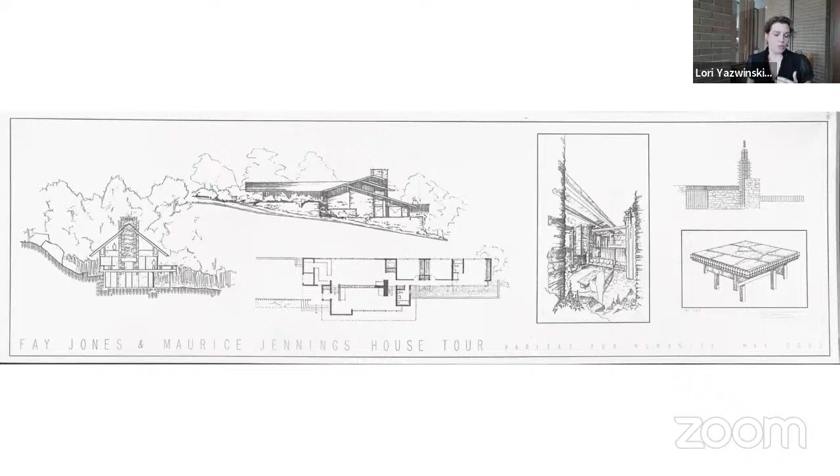So by no means do I consider myself a Fay expert in that respect. But like I said before, I've had the opportunity to work in the office, to study the work, to study the details, to study the ideas. And so in that respect, I feel like I've learned him or met him through that.

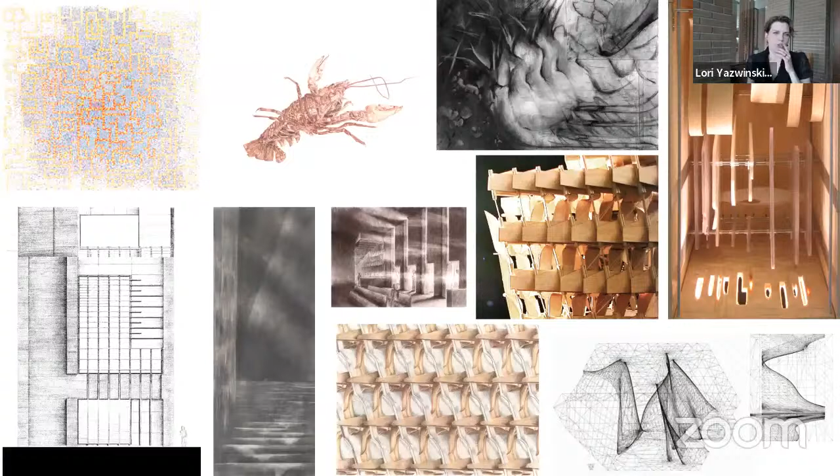This is just some work I did through school. I was really obsessed with light and craft and building things. This is actually three 32nd-inch squares filled with watercolor. It's supposed to be a kind of abstract map of sorts.

But the school is a great place to learn about different crafts, and there's such a diversity of professors and you learn a lot and pick up a lot. I was happy to be educated through the school.

And then I carried it through after I graduated. These are just some small projects I worked on, either with my husband or by myself. I'm really obsessed with wood, kind of part of the business. I built a bench for my friend.

This one was an old record cabinet that I found on the side of the road, and I brought it home, and my husband and I turned it into a digital music player. I diddly-dallied in jewelry, and then I made a bench for my son when he was about 2 or 3 years old. But kind of the overarching scheme is craft and repurposing.

Some of the wood was recycled wood that I had found. So I've kind of always been within that vein.

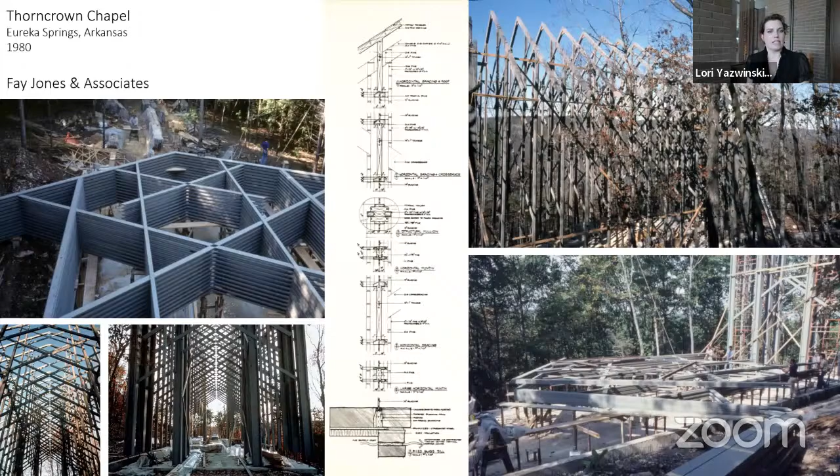And then blurring the inside with the outside. I think this image shows it pretty well, where you look through the structure and see the trees. There's almost no difference between the two. So that whole idea of blurring the inside and the outside, celebrating the structure, and designing with light are a few ideas that we take from these types of projects and use now.

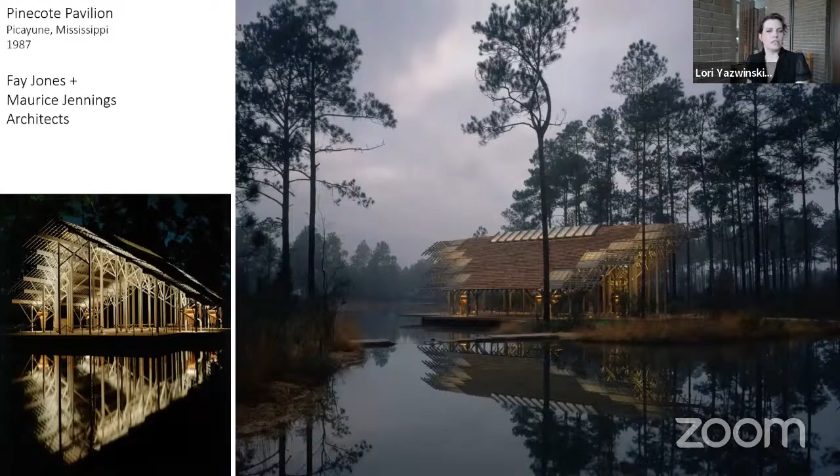Just a few more images. You can see when you look at it from the front, it just looks very simple, just columns and cross bracing. But it's really a remarkable composition and the way it works within the landscape, which was a preserved strawberry field, I believe - a reclaimed strawberry farm that's been transitioned into a coastal forest with trails and recovered wetlands. So the whole idea of the Pinecote Pavilion and its environment is pretty great.

So I don't know if many of you would be familiar with the Lindsay Wilson Chapel, John B. Begley.

A lot of people know Fay for his wood and steel structures, but he also had some really interesting masonry buildings, this being one of them.

One of the ideas we try to preserve is honesty of materials. There's a saying, 'what does the material want to be?' Is that Louis Kahn? I can't remember. But what does the brick want to be? What does the brick want to do?

This chapel is also interesting because there aren't any windows. The only light is from the oculus above, so it's very internally oriented. It's on a busy campus, so there weren't necessarily views, so they're trying to create a spiritual space without distractions that introduces light and texture.

As you can see, the dome was produced in panels and then fabricated, all put together and put on top of the building. The dome was actually fabricated in Fayetteville. But I just love the way the brick was used and the way the light was used as well. You don't have to always have windows in order to have beautiful light.

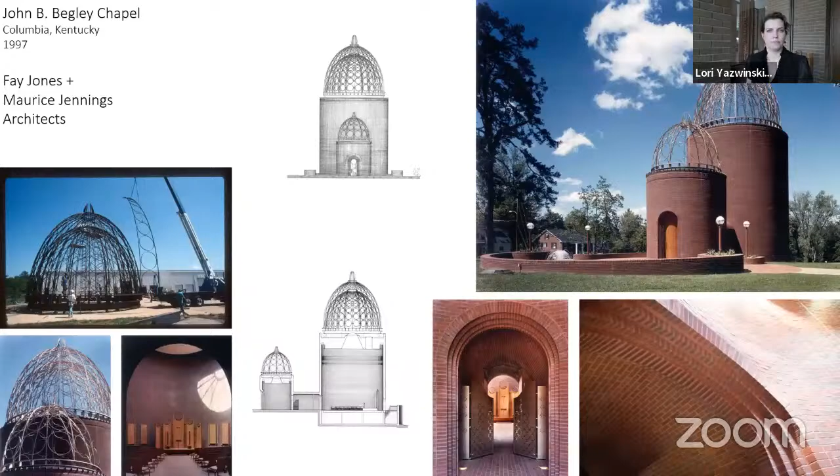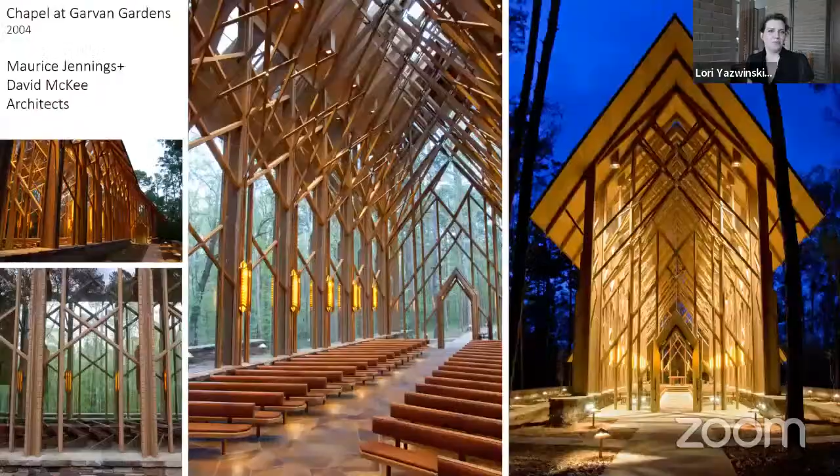And then the chapel at Garvan Gardens. This was actually one of the first projects I worked on in the office. I worked in the office a couple of times in the summers when I was in school, and I was given the job of drawing out and measuring and quantifying every single piece of glass in the chapel.

There is some controversy about a miscount. I'm not going to get into it. Depends on who you talk to, what story you get, but it was a bit tedious. But I learned a lot. There's a lot of pieces of glass in this structure, and these mullions are there for a reason. They divide the glasses. They're not there for decoration.

The other thing I worked on, I think I spent like two weeks on a downlight for the ceiling, and they ended up not using it, which is fine. It looks great. Everything's great.

What's interesting about this is it's also an evolution of the idea of Thorncrown, where Thorncrown had the bents, and between the bents was what we call a discontinuous connector, right here, where you can see an opening where the pieces meet. But this, instead of being two-dimensional, is a little more three-dimensional. Instead of the pieces just coming together, they come together at an angle, which makes the geometry a little more complex.

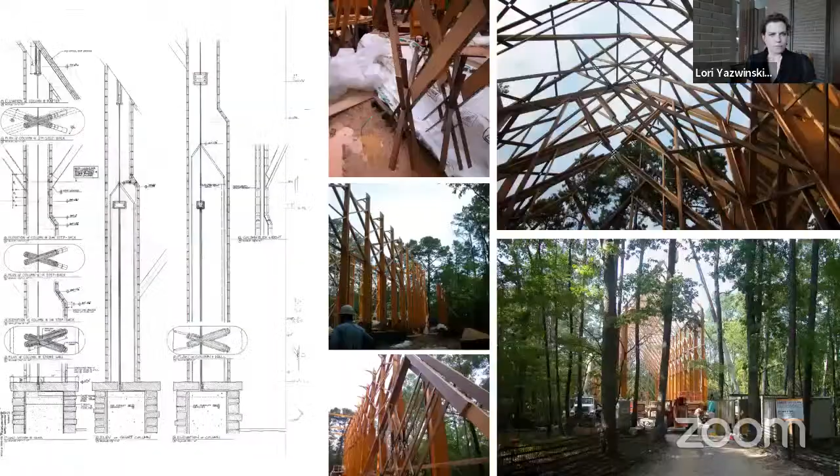Here's a detail showing what that might look like. You can see the columns are at an X, so the cross bracing comes up and meets the other piece on the other side. And here is one of those discontinuous connectors — you can see how complex the geometry was.

When we worked on this project, we were still drafting things by hand, which, if you can imagine, made drawing things three-dimensionally quite complicated. In this case, I believe Walter actually convinced them to use 3D CAD to develop that so we could understand the geometry a little better. When we gave it to our metal fabricator, he initially tried to make something that didn't have some of that complex geometry and angles, and tried to shift it. It didn't work.

So it was about evolving the details, evolving the technology we use to communicate those ideas, and also just how beautiful it is — having the structure come to a point where there's an opening, and how that plays with the light and the lightness of the entire building.

The Hunt Memorial Chapel was built in 2013. This was built on the Hunt Memorial Gardens, which is technically a cemetery, but the building is purposed for funerals, weddings, celebrations of life — basically anything anybody could want to do in a chapel like this. Part of what we had to do was work with the view: how do you create a chapel that's used for weddings that also looks out on a cemetery? I'll admit, circle of life, very beautiful, but if you want to have a wedding, that might not be what you're looking for.

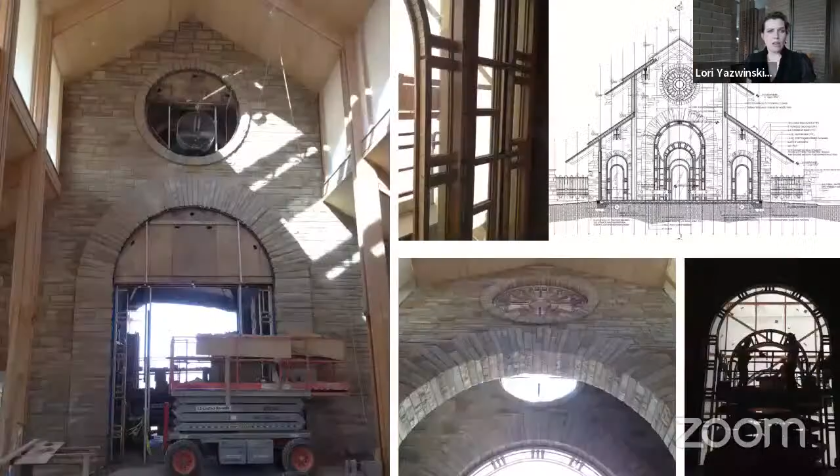What's really interesting about the Hunt Chapel is that all of the stone arches are structural arches. They were framed up, laid stone by stone, framed until they were set, and then we removed the framework and hoped it would stay. They did a beautiful job — I don't know many buildings that have functional stone arches, but that's what we talk about when we talk about the honesty of materials and celebrating the structure. There is steel in that wall and some insulation, but the stone is what's holding that arch up.

I have a detail of it here, and there's a gusset in the middle. The Hunt Chapel is a bit more open than the other chapels — there's not a lot of cross bracing because the stone is really what makes it work.

It's the idea of permanence — it's supposed to be there in perpetuity. However long that cemetery is going to last, we want this building to last as long as well, and we want people to be able to use it and enjoy it. Part of that was the permanence of the stone.

Another detail we have, which we've always done in the past, is site-built windows. We usually don't do manufactured windows. We will frame up and trim one side of the window, set the glass in, and trim the other side. This helps with the idea of blurring from the inside to the outside, and the light is really nice. Also, there's no way you could actually do these mullions without having them custom built.

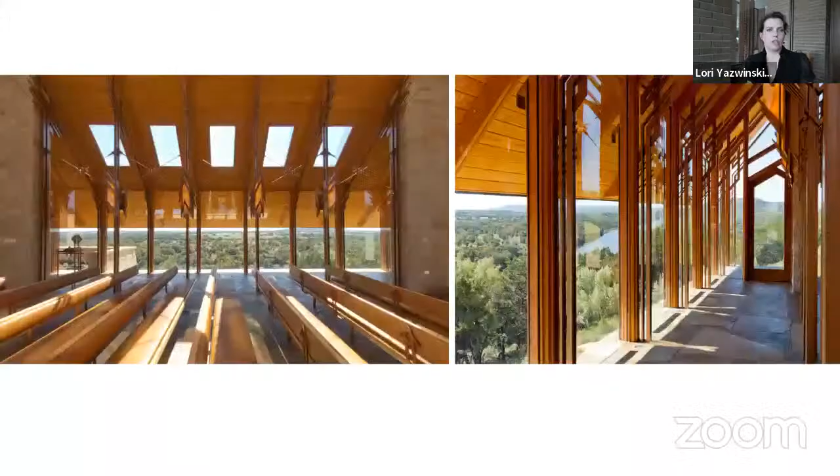But I think the structure is probably one of the more interesting things. Here's the look down on the Brazos River where you can't see the buildings beyond it, blurring that inside from outside. If you're standing here, you really feel like you're standing on the edge, about to fall over.

The other thing I'll touch on briefly is integration of systems and how we treat things like HVAC, lighting, and plumbing. You can see the supply grills here, and then the return air is actually integrated into the stone wall on the other side. We removed grout from areas and had a plinth, basically.

Here's the structure of Rio Roca. It's a series of bents, like I mentioned before, but it's a tension rod with turnbuckles. These turnbuckles are threaded on either side, as you can see, and then attached to this diamond steel plate. That's what holds the whole roof together. When we work on things like this, we go through the design process and propose something to an engineer, who helps us size things.

The columns and the other structure are a flitch plate, so the steel is actually sandwiched in between wood, because we needed wood to be able to trim the glass and everything. It's also about using the materials in a way they're meant to be used—steel is very good in tension, so there's a lot of tension in the steel, and wood is very good at compression, so it serves as the columns. Really understanding the materials, what do they want to be, and using them to our advantage.

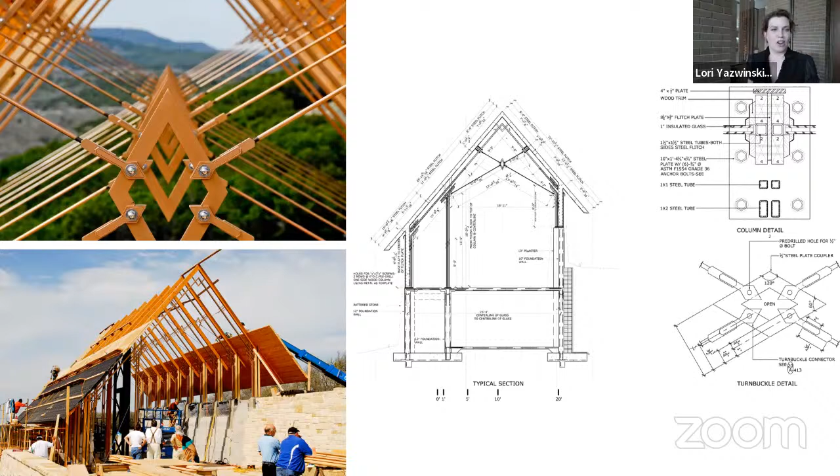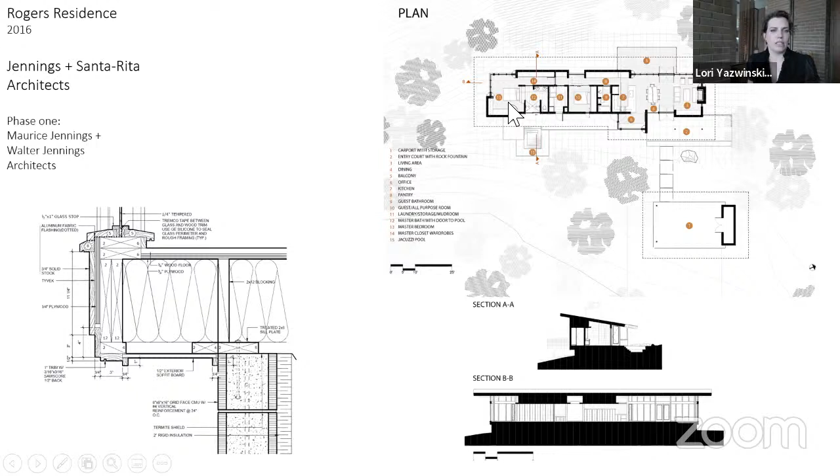As I mentioned before, the idea of implying space from things like ceiling articulation or lighting, or any type of difference in materials - we lowered the ceiling in the areas that were transition spaces. So in the living room, there's a little pop-up in the middle of the hallway, and then in the bedroom you get these higher ceilings that you can really enjoy. You're led through the hallway into those.

Here are several images. It's a simple shed roof, metal roof. The site is right next to the Rogers Airport, so we're trying to turn our back to the airport, sloping the roof up towards the view, which is a really wonderful gully. As you can see, it has a bunch of dogwoods.

We exposed the glulam beams, which I think was the first time we had ever tried doing this, rather than wrapping them in trim, which has been previous practice in the office. What's really nice is you get the texture of the glulam, you get the honesty of that material. And I don't have any good images of it, but the way we trimmed around the windows ended up being another really beautiful aspect of the detailing on this project. They did a great job detailing and building that.

But we also love this - this is Hardie board, which we use. It's very economical and easy to maintain. So we used the Hardie board and painted it a dark gray, but then used the wood and these steel elements to bring some warmth to it. So it has some really nice contrast to it.

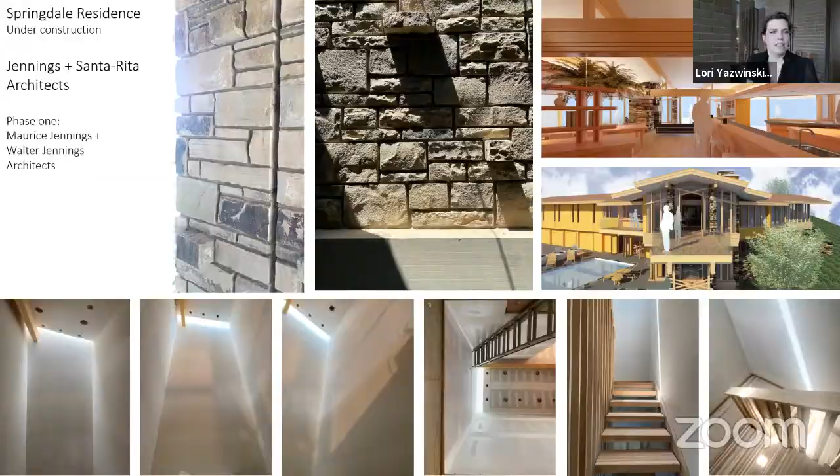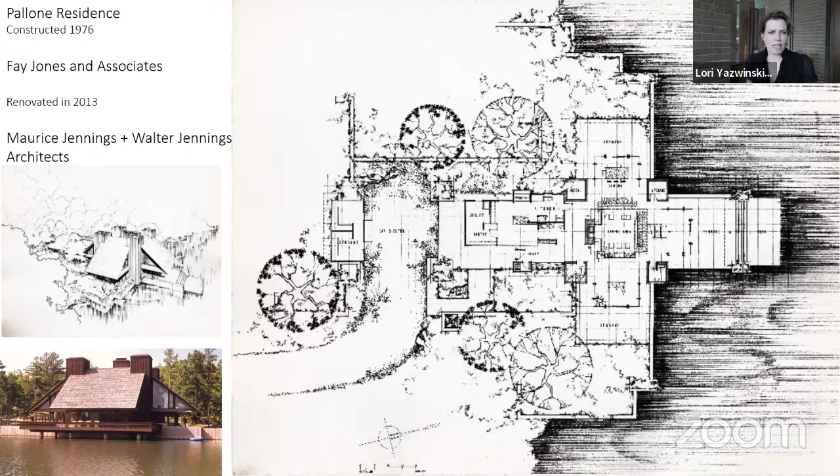Part of it was that the previous owner had put these columns and gutters on the corner of this beautiful cantilever. They're not structurally required—I think part of the impetus was that rain coming off the roof was eroding the deck away, which we ended up replacing anyway with something more substantial. So we had those columns removed, which makes a huge difference. You wouldn't think something like that would matter, but we don't use gutters, and we don't try to use columns in that way.

So going back and using insulated glass can be a challenge because a lot of these openings are just too big for insulated glass. You're kind of limited by the size of glass panels you can use, so we had to add some mullions and work with the original geometry of the building to break these glass pieces down so we could put insulated glass in there.

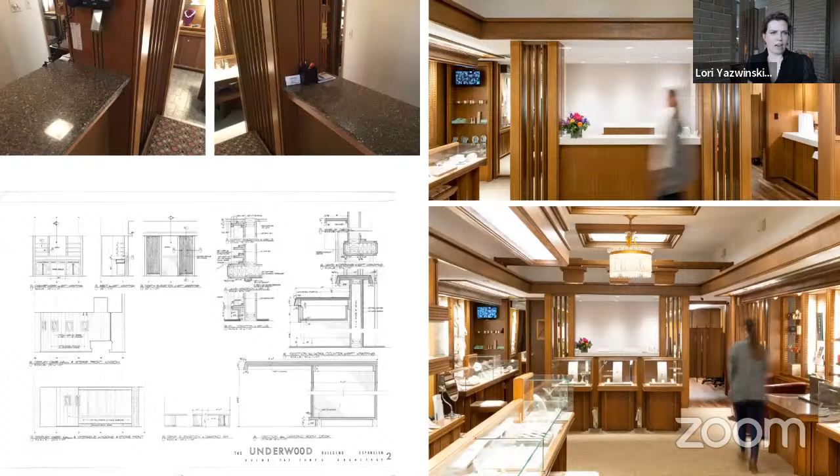What they wanted to do was address this area here, which is where they were checking out. People were confused about where to check out, and it was kind of a dark area.

So we maintained the detailing. We were very sensitive about how we opened up the space a little more, kept the fins with the mirrors, kept the same exact countertop details with this sloped edge, trying to make it bright so that when people were using the space, they knew where they should check out.

Another aspect of this was it's a jewelry store, and part of selling jewelry is displaying it well and lighting it - things look better when they're sparkly. So we designed and built this trough light, which is freestanding, that worked with the original details.

You can see how some of the lighting works in the space, which I find very interesting - all the electrical runs through these coves, and this trim carries it through these lights as well. We used that same idea to get electrical to this trough.

When you go down in the space, you can see there are trough lights everywhere. You really don't notice that it's out of place, but it lights this so much better than it previously had.

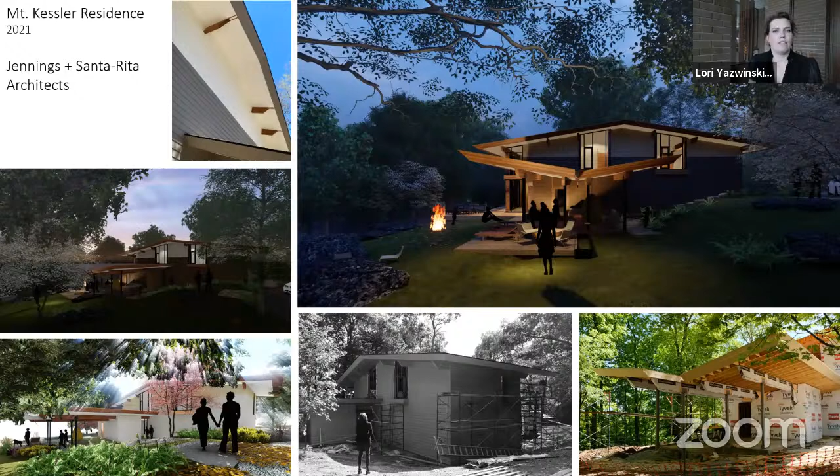So this is a house that was built in South Fayetteville. We don't have a lot of finished images of it because we're still waiting for the landscape to grow in. The clients originally owned a home designed by Herb Fowler on this exact site.

Unfortunately, due to geological issues, the house was falling apart. The foundation was cracking in a lot of places, and it just wasn't maintainable, and there was no way to go back and fix it. So we ended up having to remove that building and design them something on that same site.

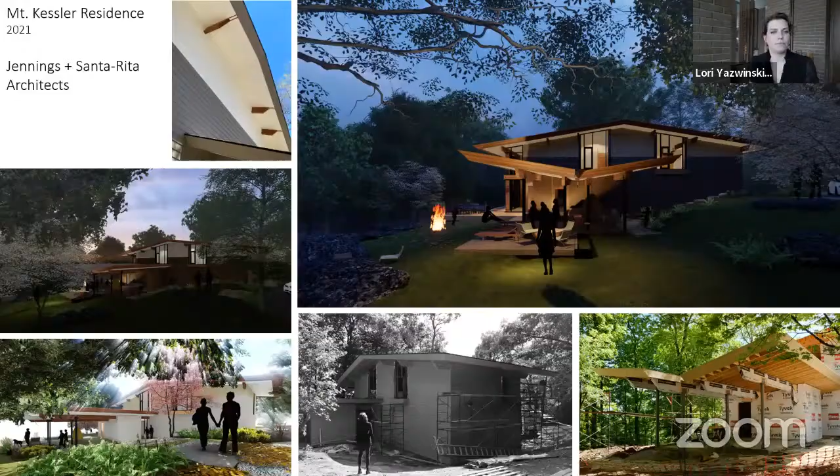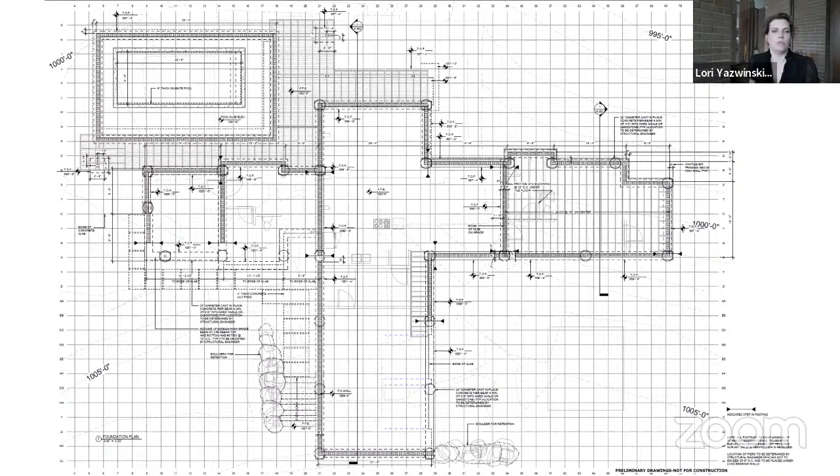As is the case when you have a challenging site, we had a very robust foundation that had about 26 piers inside of it, really making sure that our buildings last, which is something the office has always done. A huge emphasis on craftsmanship and longevity and leaving a legacy.

We love this idea of wabi-sabi, which is this really clean, finished product next to something that's more natural and rougher, working on that dichotomy.

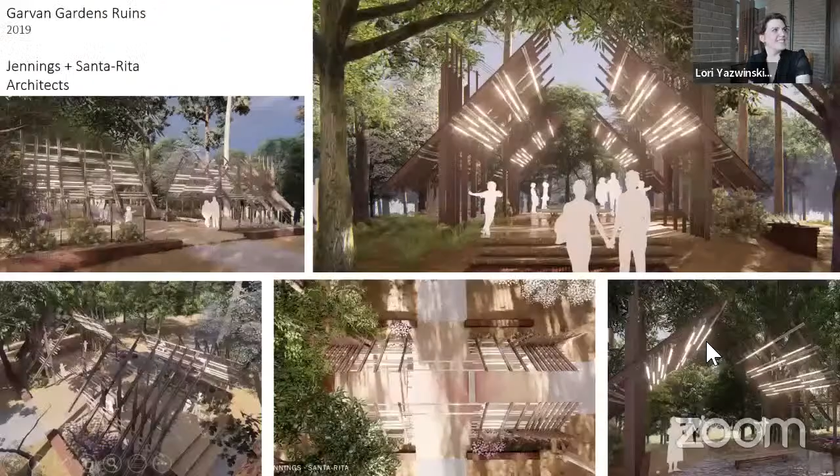This is the Garvan Gardens Ruins, hopefully going to be built soon, really playing on the ideas of light and celebrating the structure. This is on top of Old Brick Hill, if you've been in Garvan Gardens. The brick path of Old Brick Hill was one of Verna Cook Garvan's original paths, created in the 1950s. So the pavilion uses a similar brick pattern to what's on Old Brick Hill, and has a series of bents on a repetitious pattern that dithers towards the center, creating the limits or ends of the building but then opening up towards the center, so it feels a little more enclosed.

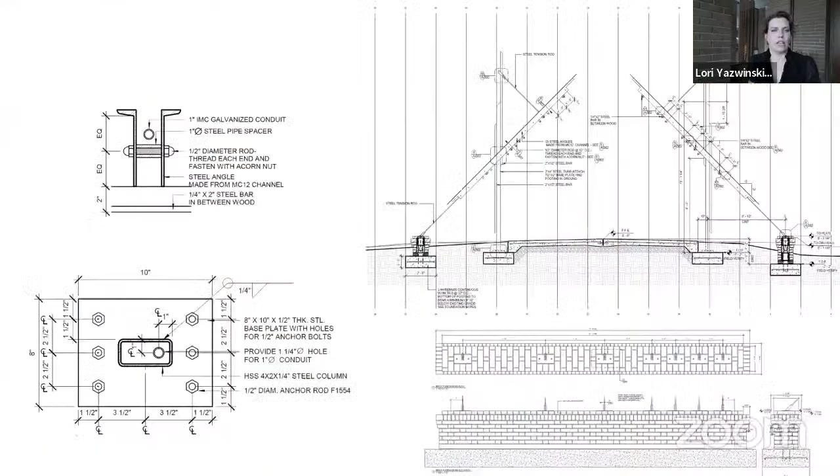And then wood cross ties that have some linear lights incorporated in them, so you can see we had to design these bents to have the lights go up. And these are C channels, using ordinary materials in extraordinary ways, with a tension rod that ties it all together. We spent maybe two full days working out this brick wall pattern so that each of those tie rods ties into somewhere that makes sense in the brick.

Just getting in the weeds. That's how we like to do it.

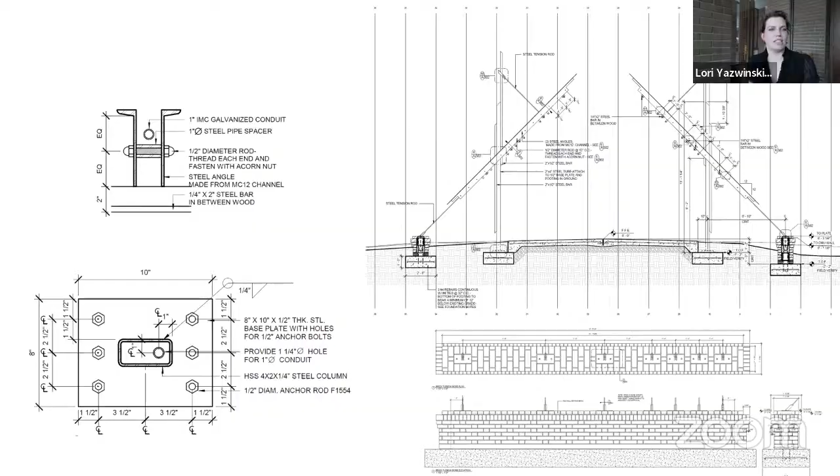This is just a fun conceptual design. We don't do a lot of competitions like this, but we really liked the program. We thought about working with CLT and heavy timber to design a cabin out in the woods, and you can see the expression of the structure and how that is a huge part of the design.

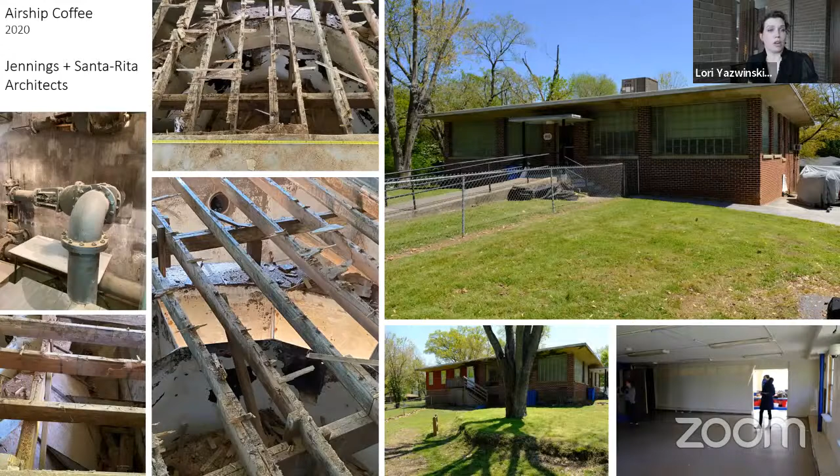This is kind of a preservation project—an old pump house in Bentonville built in 1954. It has a very thick concrete foundation. It was actually the sole source of clean water for the people of Bentonville until 1963, then sat vacant until it was renovated in the 60s as part of the Head Start initiative founded by President Lyndon B. Johnson. It was a child care center until 2014.

All of the original piping is still visible in the project. There's a large turbine underneath one of the floors that was framed over—it's massive and really interesting. We were trying to find a way to integrate that, doing a glass floor so that you can actually appreciate the history of the building. But we're still working through getting bids on this one.

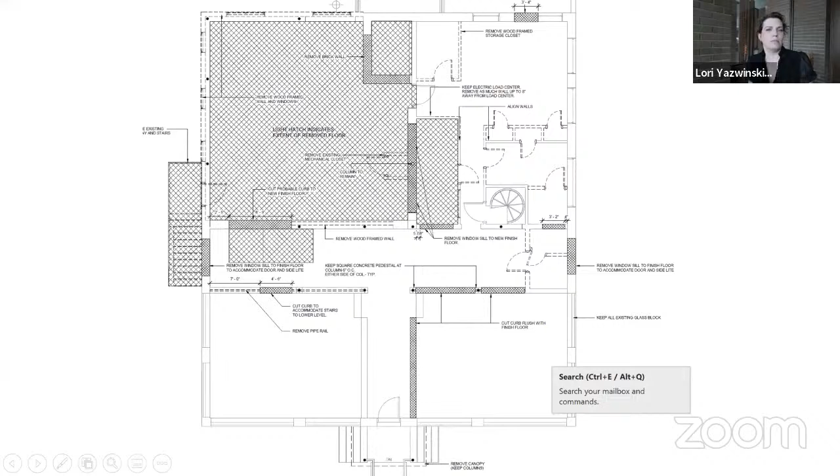And then this was open, but when we got to it, it was framed in. So part of the design we're hoping to do is to actually open up that corner that was closed in, so you can see the inside and outside, blurring that line, engaging with the back of the building, which is tied into the bike trail up there—that could be a really great opportunity.

Using certain elements that don't interfere with the original architecture, but kind of help accentuate it, and then bringing those elements inside, so it draws you in and brings you into the building. And then lighting—not just natural lighting, but artificial lighting—using some really interesting globe lighting and creating kind of a field of light, if you will.

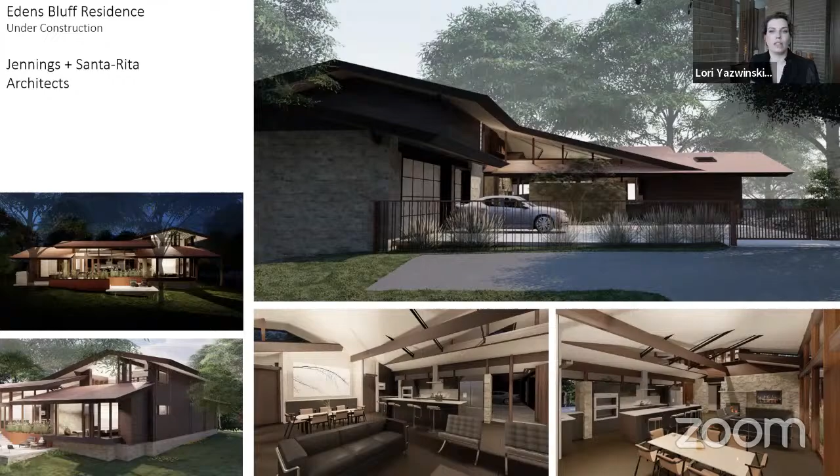And this is a project under construction right now at Edens Bluff. Really, this one's about the structure, which I'll emphasize as I go through. So here's a section through it.

You can see the roof planes are really complex. We have a roof that kind of ends here, but then we used steel ties to tie it into the rest of the structure, and you can see some framing. Here's the framing, which I think is beautiful—almost a shame to cover it up. They did a beautiful job on it. You can see those steel ties.

This is from above—there's a loft that looks down. Just a really nice detail. And like I mentioned before, steel is good in tension, so it makes sense to detail this particular aspect of the building that way.

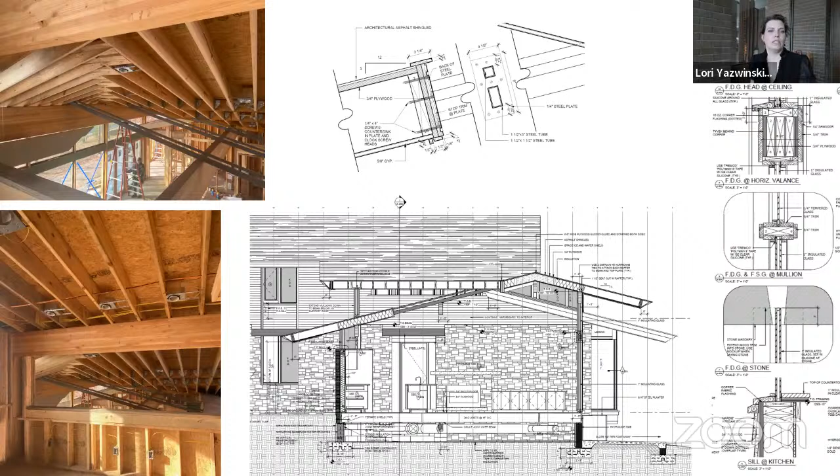And then just some basic details we use, telling you about blurring the inside and the outside—how the glass goes into the ceiling, the mullion details, how the glass dies into the stone, and then the floor and the countertops—really minimizing any obstruction between the inside and the outside.

And I'll talk briefly about my house, because you don't have to live in a Fay home or anywhere fancy to be inspired or play with these ideas. You all might be horrified by what I did, because I've changed it quite a bit, but it needed to be done. This was a 1957 home. I originally thought it was just a farmhouse, but I connected with the previous owner recently, and they said it was an orphanage, which I found quite interesting.

But when we bought it, it had lowered ceilings and felt really enclosed. The windows didn't allow a lot of light in—really just a typical 50s house. But I love the bones and the shape of the house, so I really wanted to accentuate that.

And then we kept the cross ties and trimmed everything out that was exposed, those framing members, so you can really see the architecture of the place. All the windows were single pane, there was no insulation in the walls, and the electrical and plumbing all needed to be redone as well. But when we replaced the windows, we created a larger aperture in a way that allows a lot more light in.